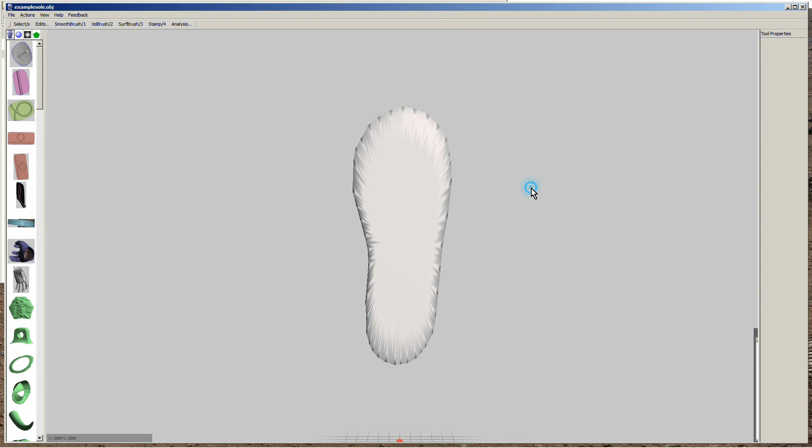Okay, there's your sole. Now you notice all that sort of distortion around the edges. It happens a lot when you transfer over from Hexagon to Meshmixer. We can fix that up just by remeshing it.

Luckily, we've got some face groups here. Notice the edge around the sole is green, so it's been grouped already for us. So we're going to just go ahead and remesh that—look how smooth it is.

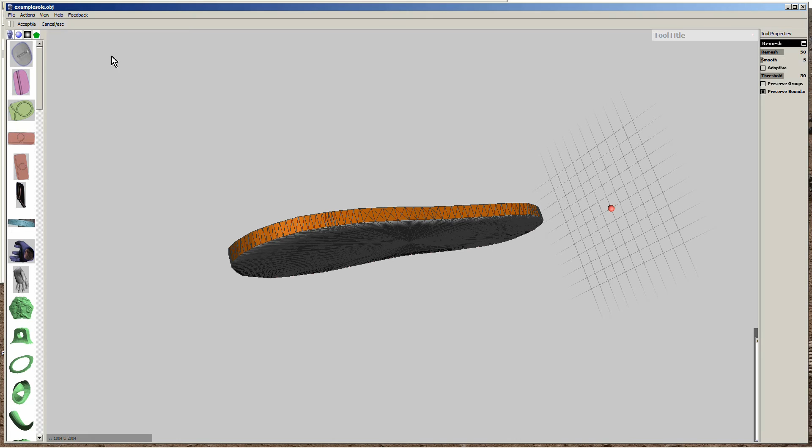See, we're increasing the polygon count here to make it smoother. I think Meshmixer is far superior at remeshing than Hexagon is, or Sculptris for that matter.

So now I'm going to do the flat part because all these triangles are not easy to work with or manipulate. We're going to remesh that, smooth it out 100%, and remesh it 100%, adding as many polygons as we can. This is the bottom of the sole, so it doesn't need to be as high as the top. You'll see why in a minute.

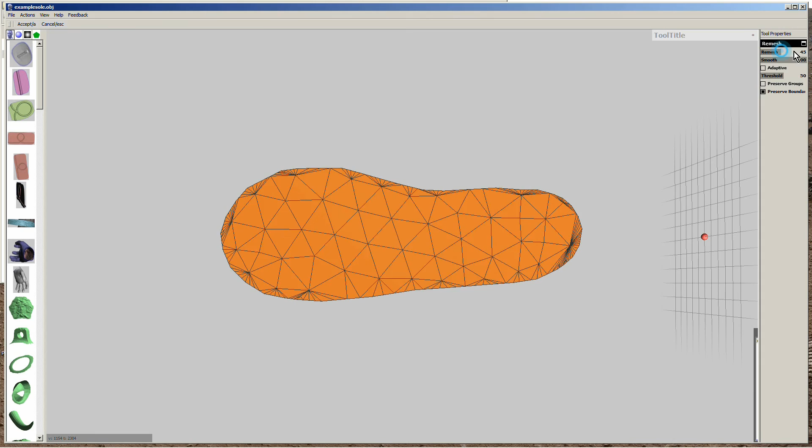This is the top. We really want a lot of polygons in here. So I'm going to mesh this twice—remesh this twice, I mean.

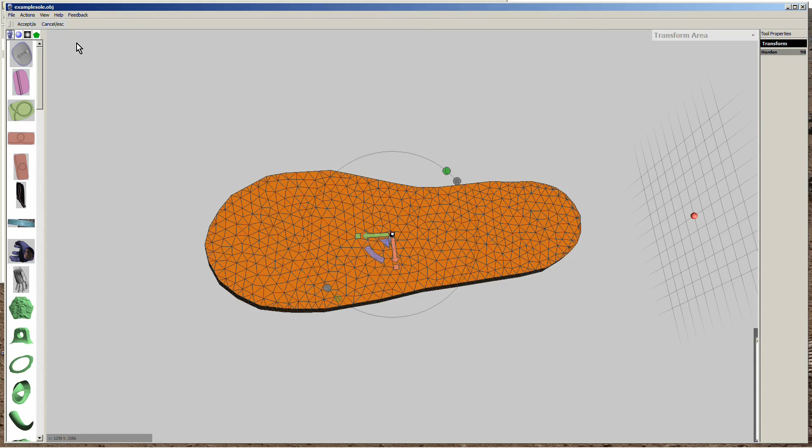Now we're going to start working with it. First thing I do is I use the transform to shrink the selected part of the sole. Now I'm going to start forming the top of the sole using this transform tool. I'll keep the clip at normal pace for a few of these sections so you get an idea of what I'm doing here. See, shrank it, so I've accepted that shrink.

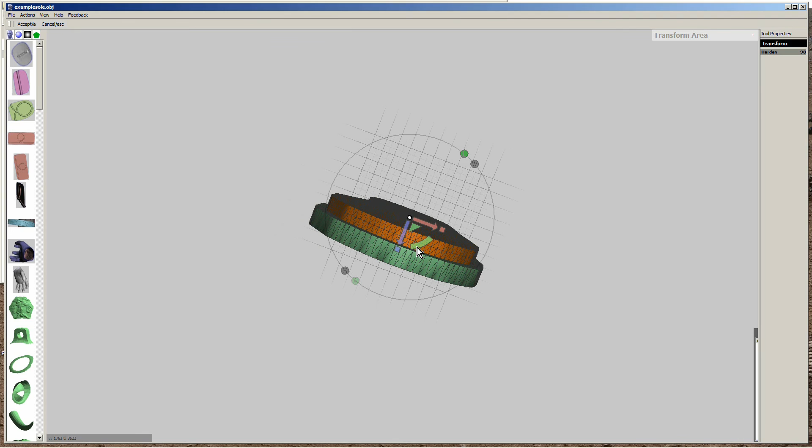Now I'm going to go ahead and transform it again to form the first rise of the toe. It's a little higher than it really should be, but I wanted you to be able to see it. Notice the rise. Now I'm going to grow it a little bit. I don't know if you've noticed, but shoes kind of come down into the sole.

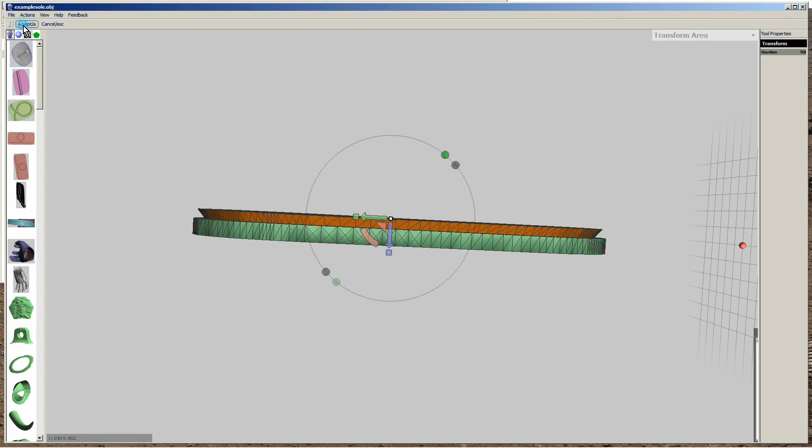Now this sole is real flat, but don't worry about this right now. We'll take care of that in the second part. I don't bother clearing this because I'm going to incrementally shape the sole using this transform tool.

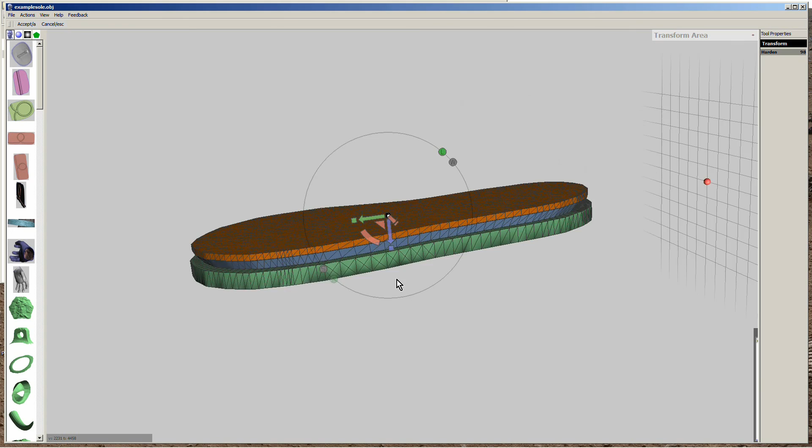Now this is the second part. I've just kept the group selected, and as you accept this transform, it creates a new ring of polygons, and it's a whole new group. See, your top there remains selected, so you can just keep working that way.

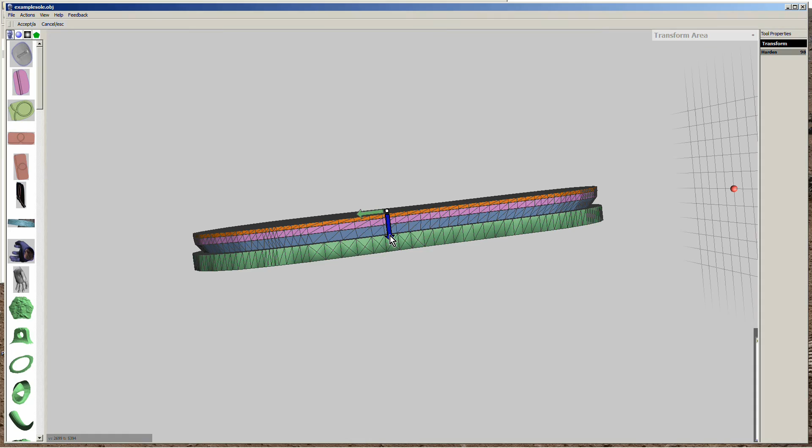And this isn't going to be the perfect shape. I'm going to have to tune that up later, but using the transform tool we can get really close, and what we do is create an even mesh, more or less. It's more uniform and easier to work with when it comes to actually shaping the shoe.

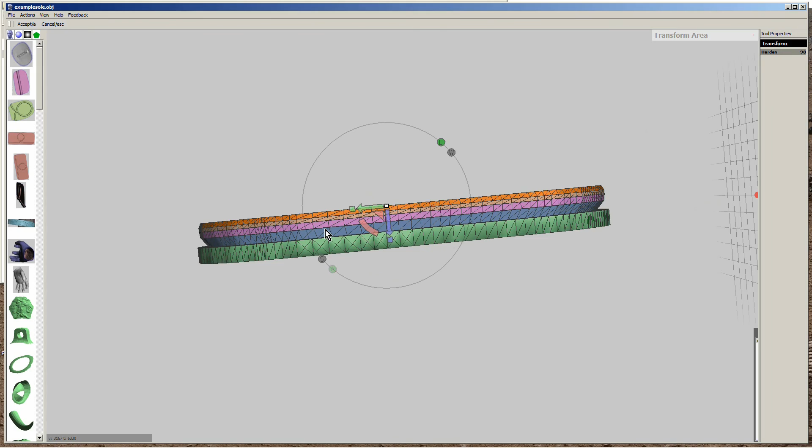I'm sure there's easier ways to do this. I mean, for one, you could probably scan it. That would be easier, but where would be the fun in that, you know? It's just scanning it, and mainly it's not what we do stuff like this for.

I had experimented with just taking primitive spheres and shaping them and putting them together, but this seems to be the best method so far. It comes out with a more realistic looking shoe every time. And of course this one's not going to look realistic because, like I said, I'm just doing this for demonstration purposes.

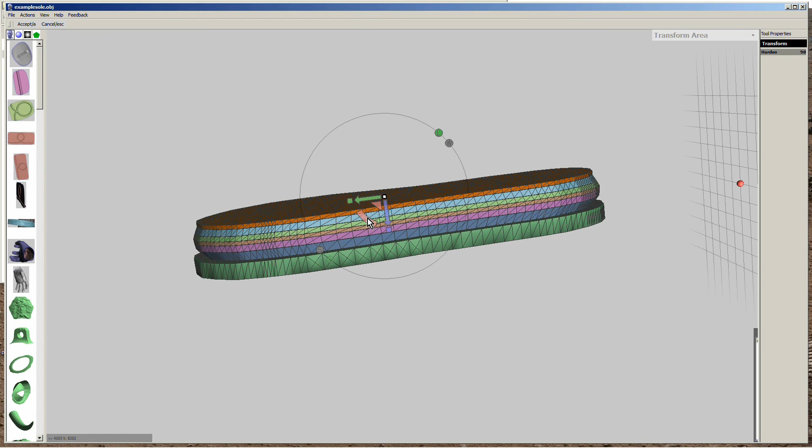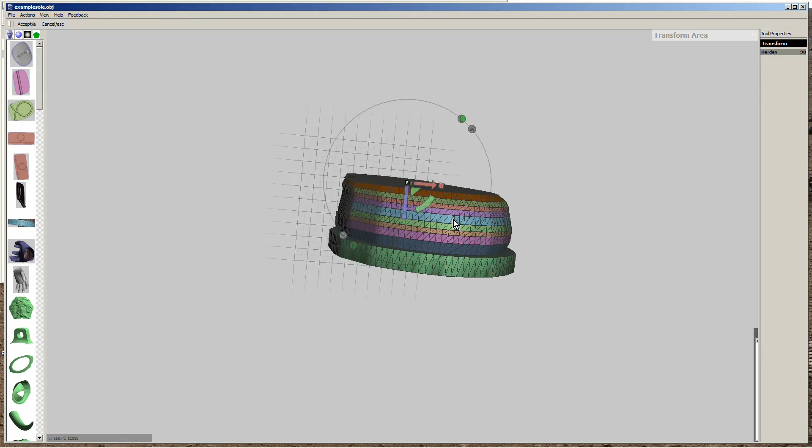I'm going to speed this up so that you don't have to sit here all day and see layer by layer. Basically I'm just dubbing this narrative in here. I'm not working on this right now, I'm following the video.

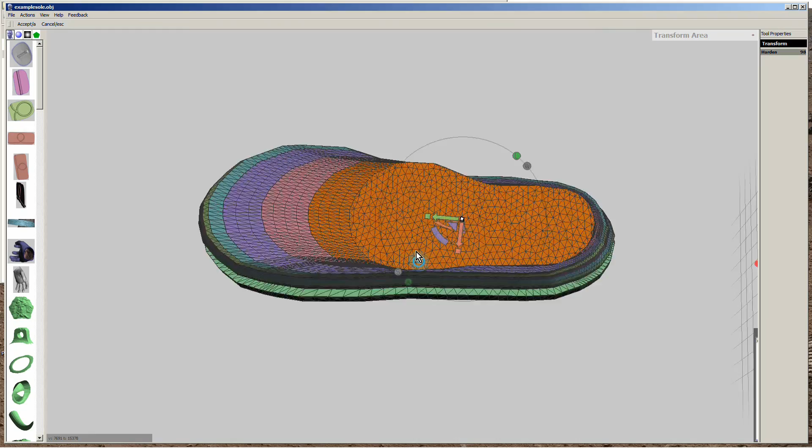So you can see I'm just building it up, and it's all kind of flat. It's taking on a basic shoe form. A few deformities here and there that will need to be tuned up. But the thing I like about it is the mesh is staying more like a grid, and it's easier to work with and simulate the look of leather, I think.

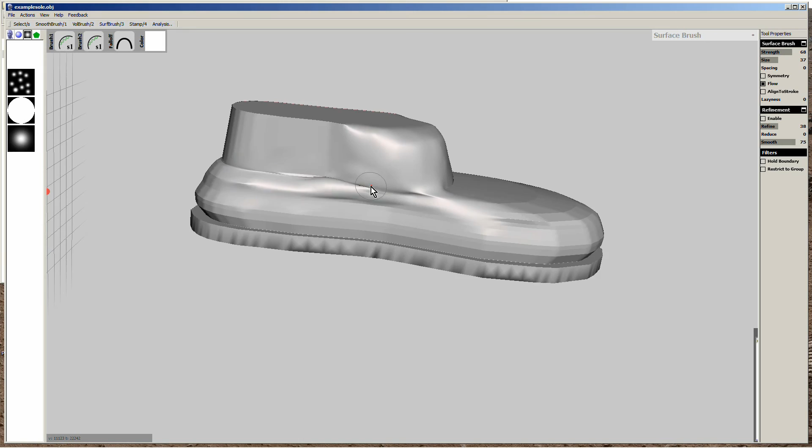Now I'm taking the vertex color off so that I can smooth it out. It's too hard doing the smoothing and shaping of the shoe with the vertex color, or with group colors, because you can't really get an idea of the shape. It's all colorized like that.

I'm working out some of the wrinkles. Now I'm using the regular smooth tool, and I'm using the bubble smooth, and I'm using the reduce smooth tools, and those brushes are great to interchange to get to the point you want to be.

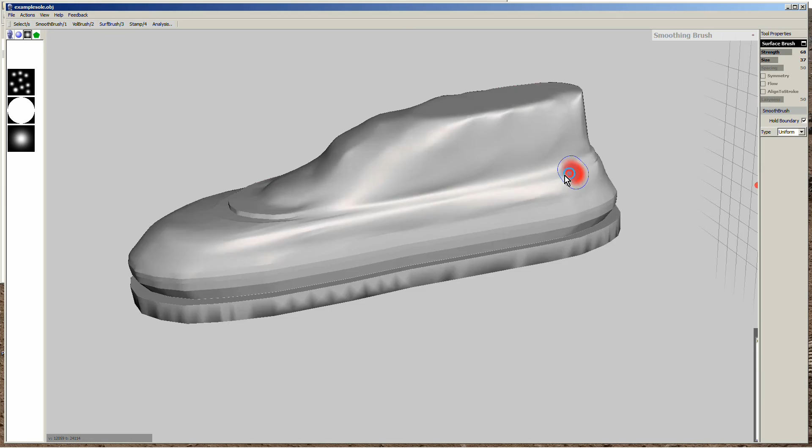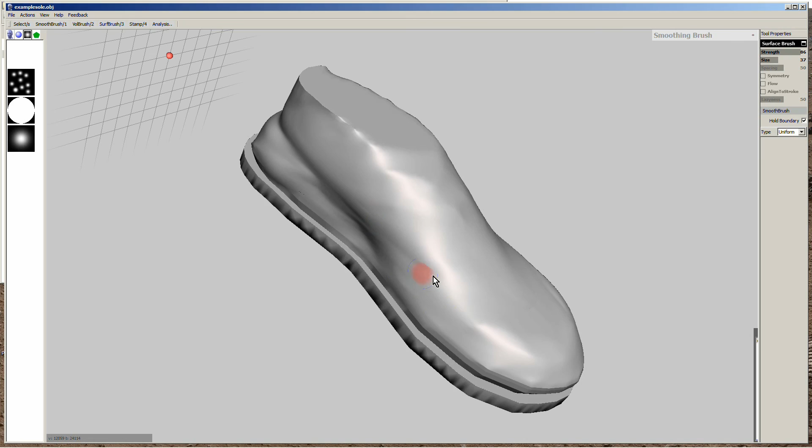That better. Excuse me, that's my chair. It's very noisy. Gotta get a new one.

So it's starting to take on the shape. I also like to use the inflate tool wherever I screw up.

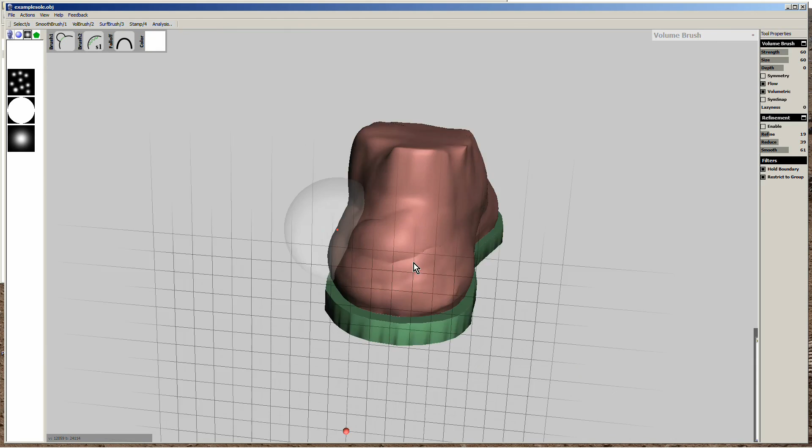Now, right now, I'm going to regroup it so that I can. The nice thing about the bubble tools and a lot of the brushes is you can restrict them to groups so that you don't mess around with your sole.

You want to keep your sole free of anything, just flat and the edges sharp. So it's always good if you work with the bubble tool restricted to groups and maintain boundaries so that it doesn't distort the boundaries between the sole and the top of the shoe.

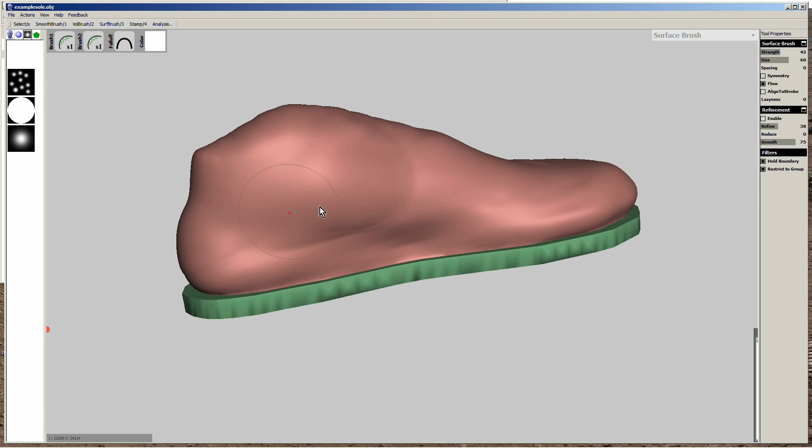Now this is the reduce or the bubble smooth right now, and the bubble smooth is smoothing out some of what the inflate did. The inflate tends to distort a little bit. It's not really even, it's not like Sculptris. You have to use a combination to get smooth shapes with this.

So this is kind of sped up too. Excuse me.

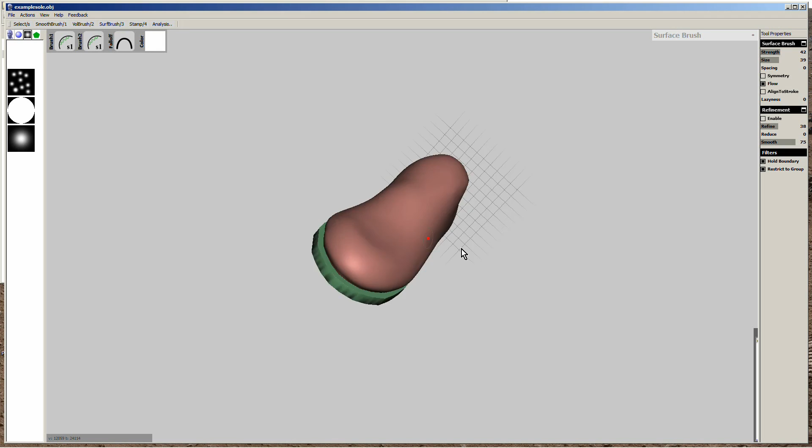And I'm putting in some wrinkles here and there. I use the plane cut so that I can level the shoe off, to make it look more like the top of a shoe.

Now I'm using the transform tool to put in an ankle again. This helps prevent the top of the shoe from getting distorted when you're working on the edge of it. You can remove it later, but sometimes I just leave it so that I can unify it to the pants.

Taking the whole shoe back into Hexagon now. The reason for that is Hexagon has this really sweet bending tool. Shoes aren't flat like that.

So what you want to do is bend the sole so that it looks like a real shoe. We're going to do that. Basically what you do in Hexagon is import the object, which is our shoe here, that we kind of semi-finished in Meshmixer.

Now with the line tool we're going to describe an arc. You can have an extreme arc, which is good if he's stepping or about to step, and your figure's about to step. So you can make the arc really extreme, which I'll demonstrate right here.

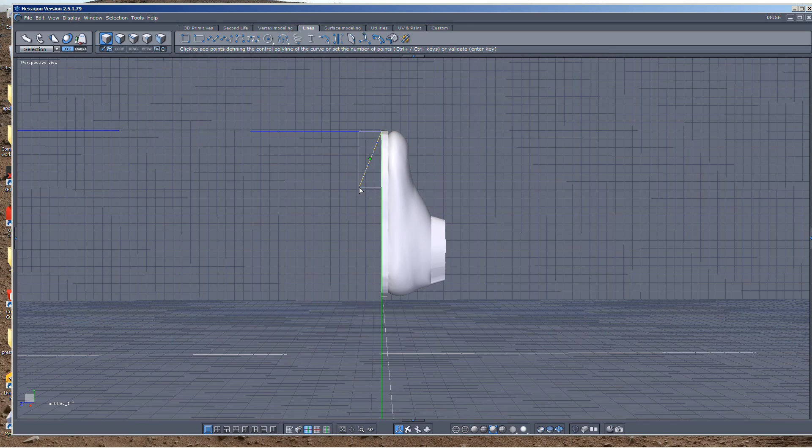With the arcing tool, or the curve tool, you can set more than one point. I'm just going to set one point here. This is going to be kind of extreme, not really a full step, but just to give you an idea of how much you can bend this shoe in the tool.

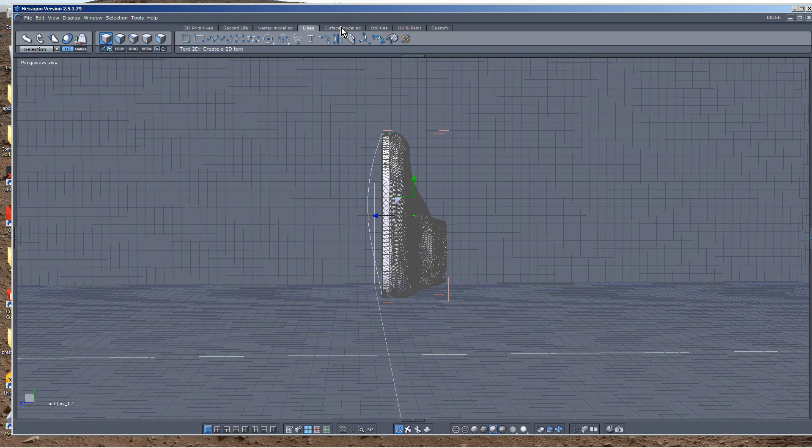Now you go to Utilities. You got to select your shoe first. Go to your Utilities tab in Hexagon and select bend, then select the curve you just made. See how bent that is?

That could be like he's almost beginning a step, but we don't really want that. We want the natural bend, as if it's standing. So we're going to get rid of this curve.

And I'm going to make a new line. It's going to be a gentler curve, so it's more like a natural standing position, or the shoe's not being used, it's just sitting in a corner somewhere.

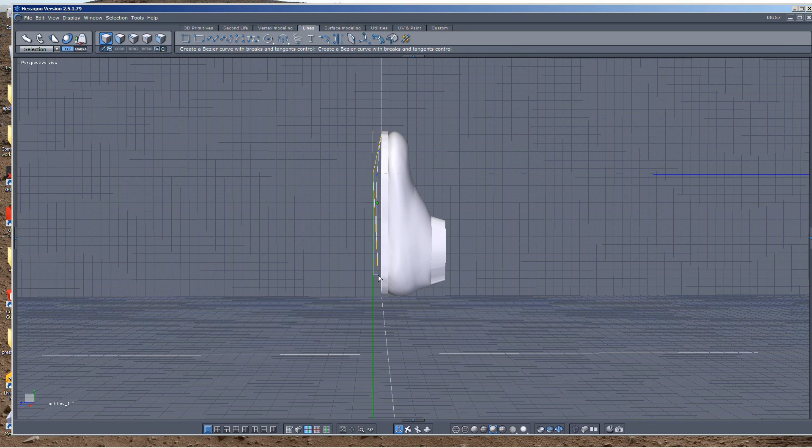I haven't added a heel right now. It's not a good idea to add the heel until after you've bent the shoe, because the bend tool bends everything.

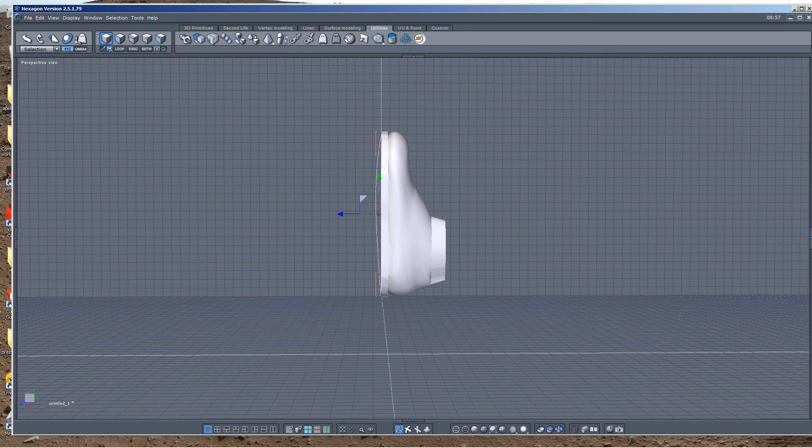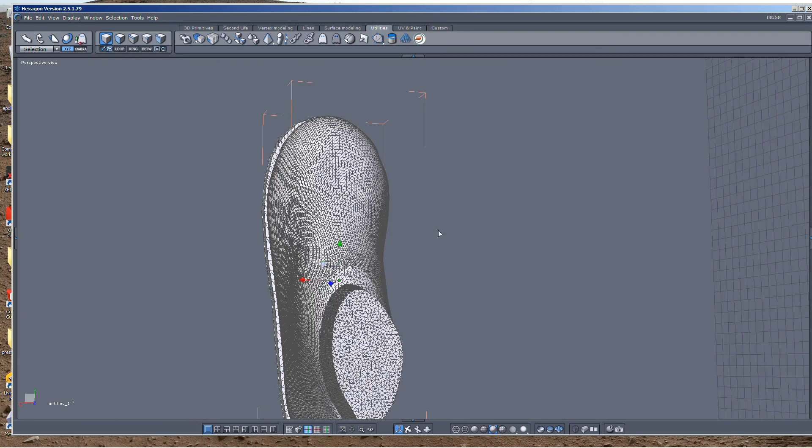Sometimes I get confused in Hexagon. Like I said, I don't use Hexagon a lot, but for certain things it's good. If you're going to sculpt for free, you got to take all the tools and learn how to use them. I use Hexagon, Sculptris, Meshmixer, MeshLab, Wings 3D, and Blender.

All free tools, including Daz Studio. You can pick that up for free too. And for a while, Hexagon was coming with Daz Studio. So anyway, I'll export it again. I think I'll call it 'example shoe bent.'

And I'll show you how to add some details, like stitching and stuff like that. Back in Meshmixer again.

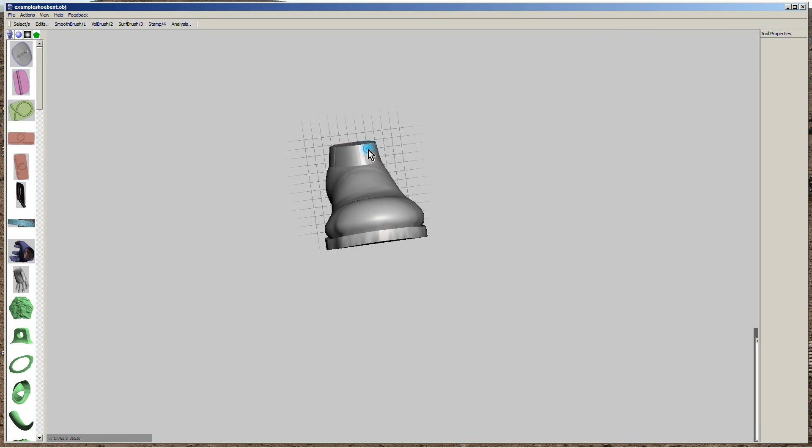There we go, we got our bent shoe, slightly bent. We're already in group coloring, so we gotta work with that.

There's a nice little option here in the edit tools. You can have it generate face groups. Sometimes they don't turn out well. As you can see, the band around the edge of the sole is all a bunch of different groups.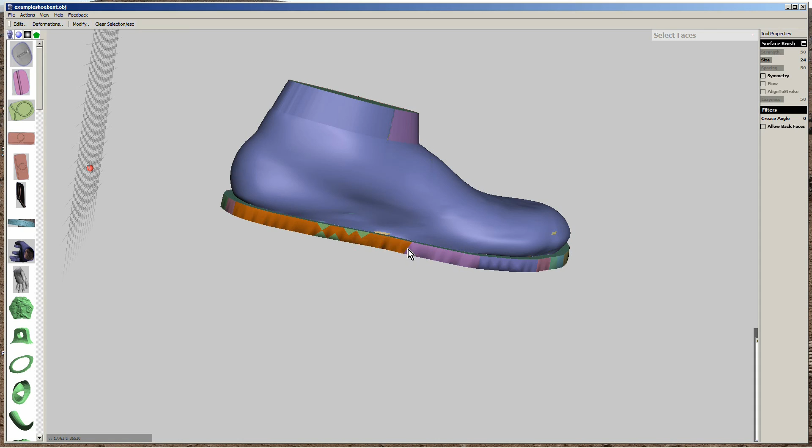But we need to remesh that. So I'm just going to quickly swipe around and select all the groups, I hope, and regroup it so that it's one group.

Then we'll remesh it. Grouping is really a great way to work on this, especially if you're going to be doing a lot of stuff in Meshmixer. You want to keep your groups separated.

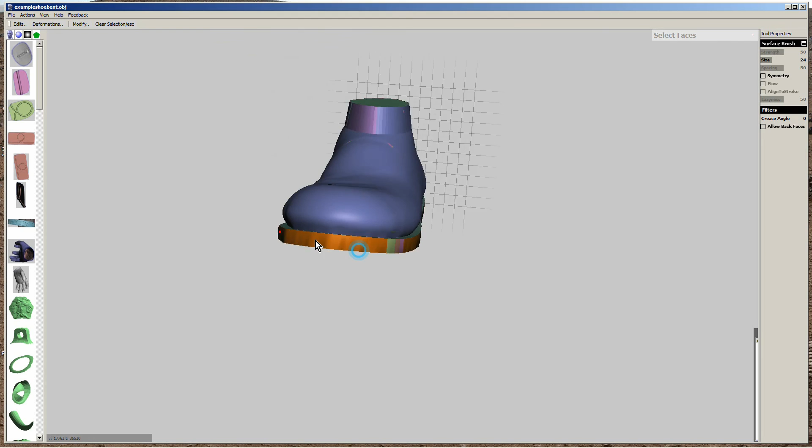Otherwise, Meshmixer tends to round everything off or try to smooth it out. I think it's an attempt to beautify the mesh, but it ends up looking pretty ugly, and it's not what you want. So anyway, I'm going to make that a group now.

There we go, we've got our own separate group for the edge of the sole. Now I'm going to remesh it so that it smooths out. You notice how it's got all that distortion in there? It's caused by the bending tool in Hexagon.

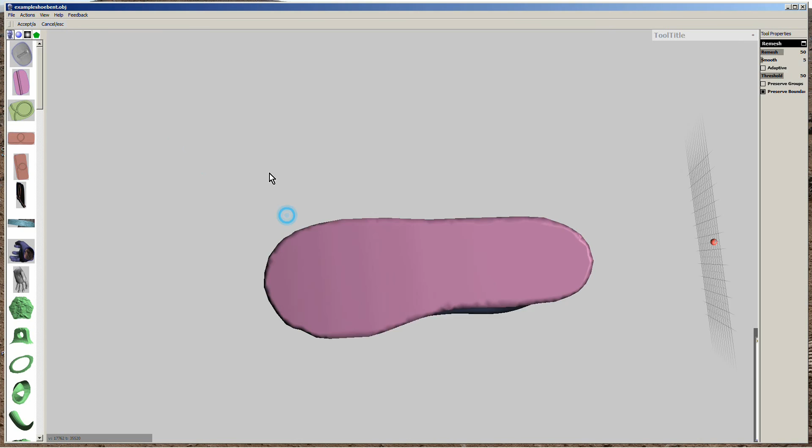Add a bunch of polygons and some smoothing on it. Keep an eye on the polygon count. See how it changes?

There we go, that should be smooth. We got a little dimple in there, but we'll fix that later. Now we're going to remesh the bottom of the sole and the top of the sole.

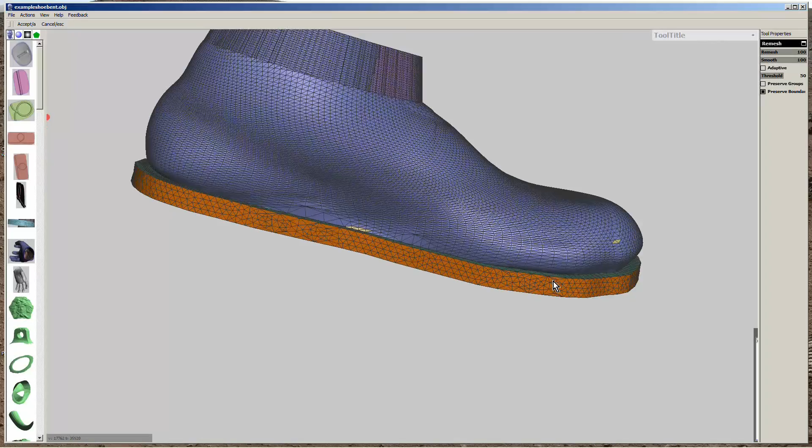Check everything out, make sure I've got all these facets smoothed and remeshed. I didn't miss any. Let's go to the bottom of the sole and remesh that.

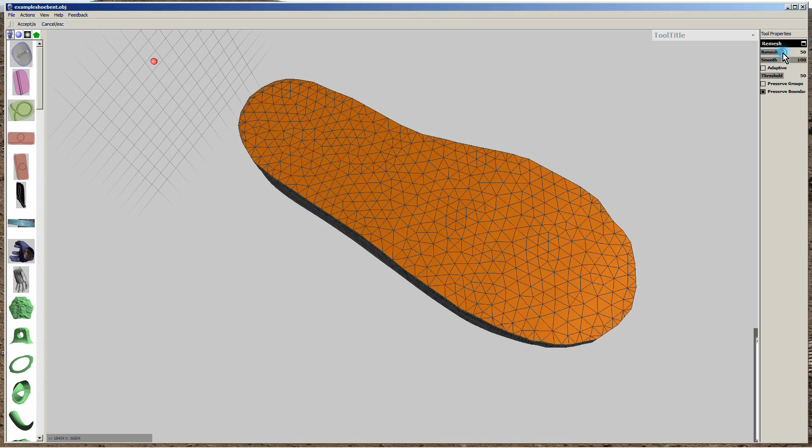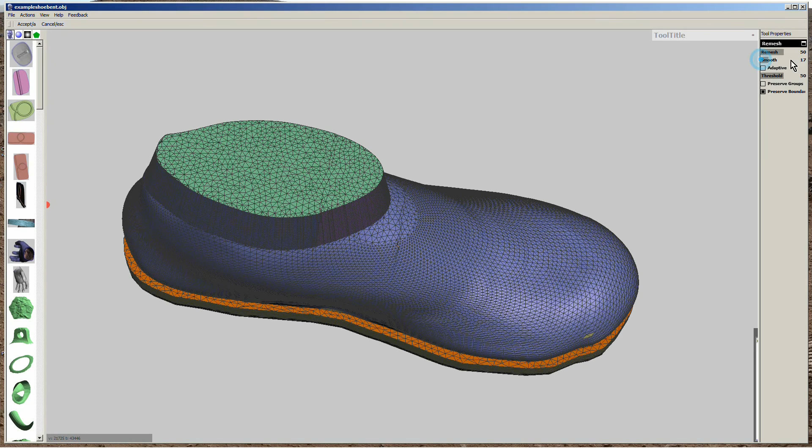It hasn't really increased it too much, but it's good enough. Once you finish adding detail to the shoe and you've got everything done, you can go ahead and remesh the shoe for a lower polygon count, and it will be one contiguous mesh without grouping. If you use the adaptive option, it'll keep its shape and form and look pretty good, but you won't have the tons of polygons that you're going to have in this shoe just to add detail. It'll reduce them all nicely.

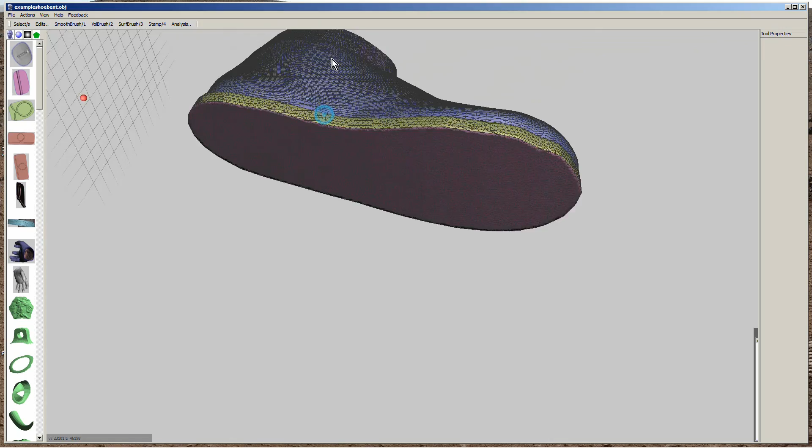But for now we want all these so that we can create the detail that will make it look like a shoe, well, as far as we can with this. I'm not taking my time on it. I'm doing it as quickly as possible, just for demonstration purposes, so I could show it to you in real time too, instead of speeding it up, doing a time lapse like I usually do.

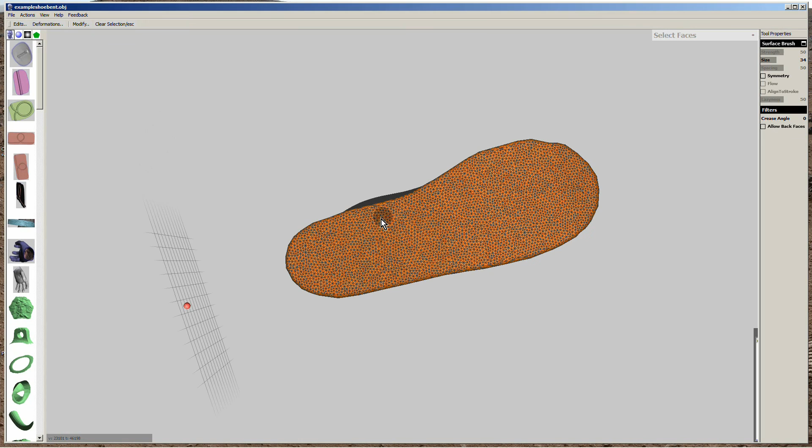The thing with the tongue, now I'm creating the heel here. I do that by selecting the bottom group and then eliminating this part of it as a selection until I've got a rough out of the heel. Now all that area there is going to be jagged, as you can see, you need a straight line to create a heel, otherwise it's going to look like crap.

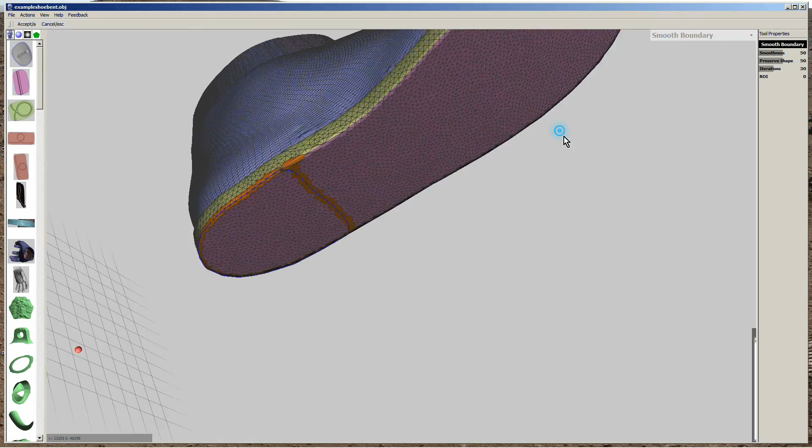So use a smoothing tool, and it straightens it out. It's a little bit curved, but that's okay. Later on you can take and use a Boolean difference and create a straight edge there by just importing a cube and using Boolean differences. But I'm not going to do this here. You could probably figure that out on your own.

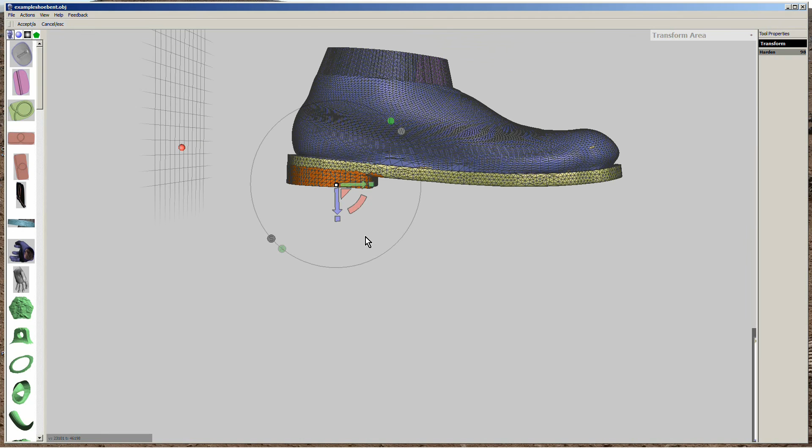Now I'm pulling the heel out, curve it a little bit, or put an angle on it so it looks like a natural heel. It's kind of crappy, but I don't want to spend a lot of time perfecting it. I'm not even working from a sketch of a shoe right now, this is all from memory, and yeah, I hope you'll forgive it. It's pretty crude, but it does look like a shoe. This is how I do it. This is what it looks like without the group colors.

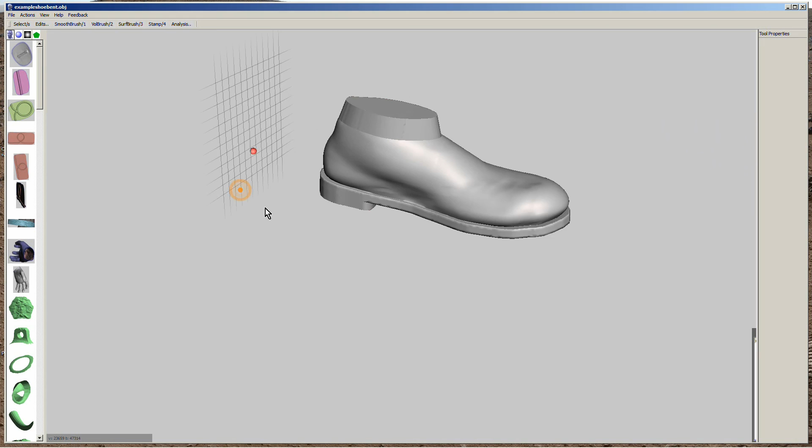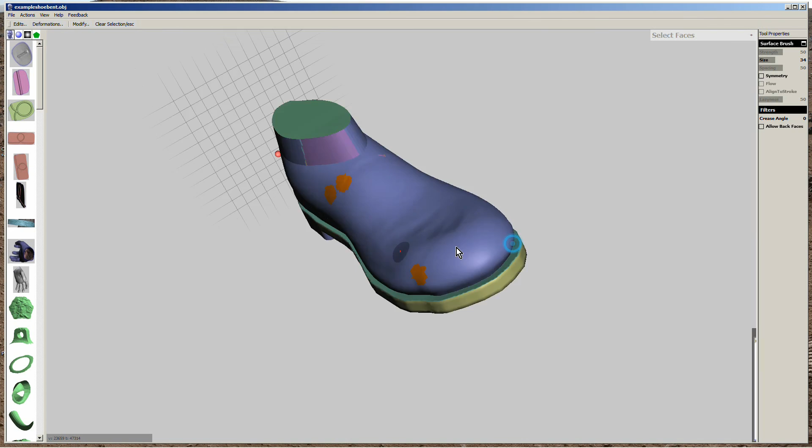Now, shoes have top stitching, and I don't know all the anatomy of a shoe, but I can see it, and we're going to kind of put the different sections of the shoe in. I do that by selecting a group of polygons and smoothing them, and it creates their own face group. But first I want one contiguous group for the whole shoe. There's a few spots in here that for some reason Meshmixer decided were part of another group, even though they're right in the center of one group.

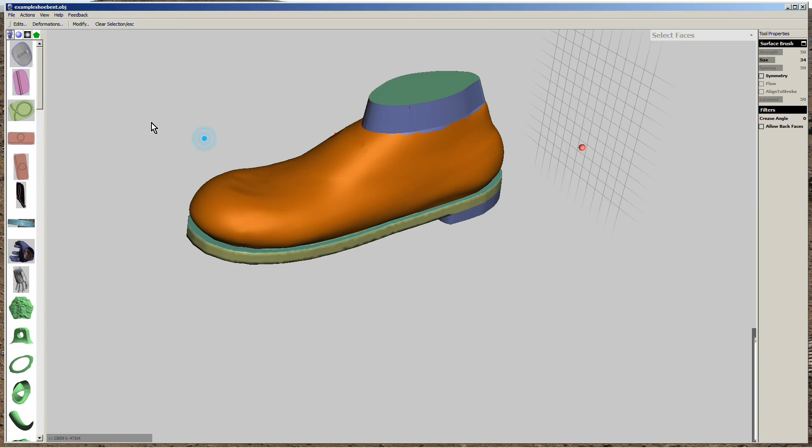So we're going to deal with all that. I don't want my ankle being a part of any group, that's just a placeholder there to keep the edges from collapsing. So I'm deselecting the ankle. Create a group, one contiguous group here for the shoe top. Now it's good, some of those edges were rough, so...

Now I'm going to cut out the toe of the shoe and make another separate group for that. And you'll see why I'm doing this in a few seconds.

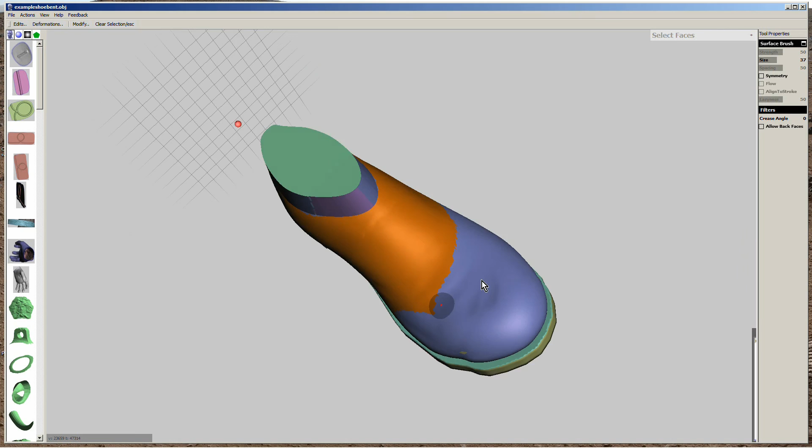Shoes are very, very interesting, I could spend a whole day on a shoe. And the nice thing about working in 3D is you literally only have to spend a full day on one shoe, because you can mirror the shoe once you finish one, and then add a few details to make it look like its own unique shoe.

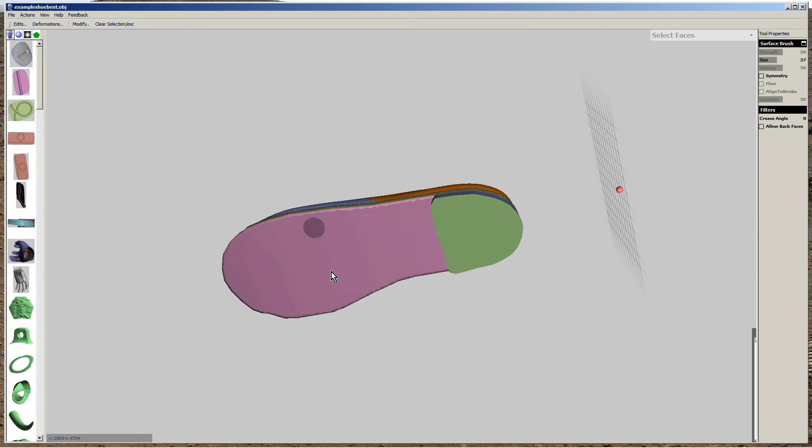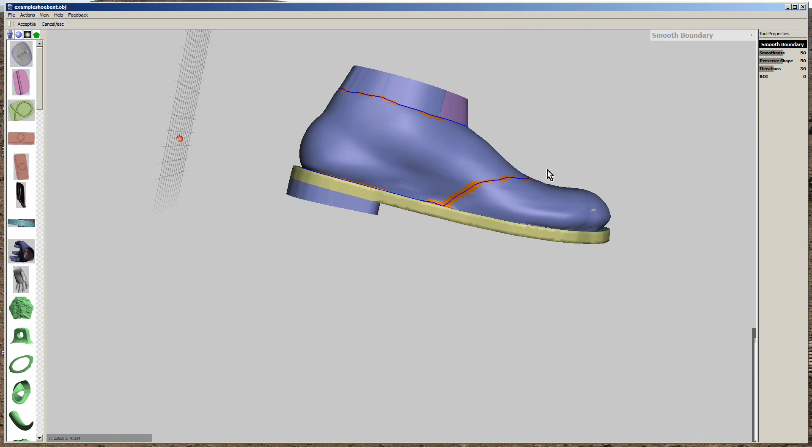So now I've defined this section of the shoe. It looks good, and I'm going to smooth it out so all the lines are nice and smooth. I put it on a range of influence down to zero because I don't want to influence the shape of anything else around it when I'm doing the smoothing. Looks pretty good, now you see I've got my own group for this section of the shoe.

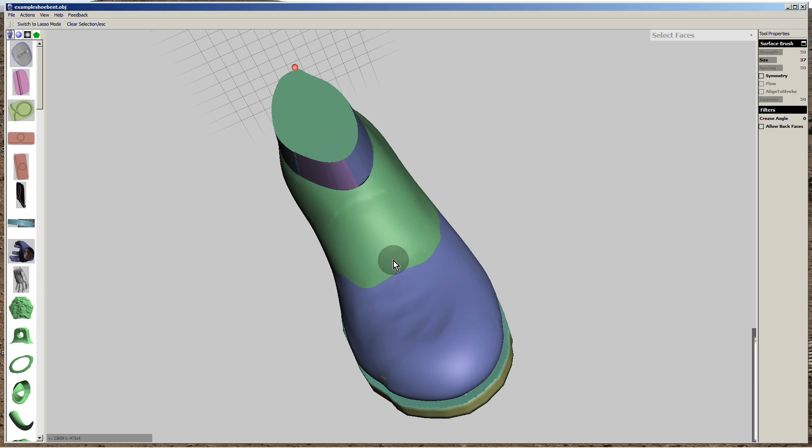I'm going to cut out the tongue here, and again, I apologize, this is very quick. It's turning out actually fairly good. I don't have a shoe here to look at, I normally work barefoot, so... looks pretty good actually, I might actually keep this one.

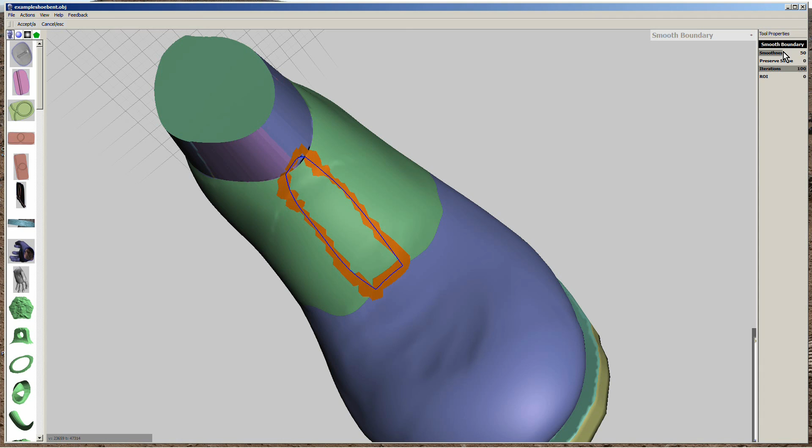Work on it a little bit more after this demonstration. Just so you know, this demonstration is only showing you Meshmixer and Hexagon. Later on I'll probably take this shoe, because it is starting to look pretty good, and work on it a little bit in Sculptris too. There I can add, use the creasing tool, they have a really nice creasing tool option, and their pinch tool is really good.

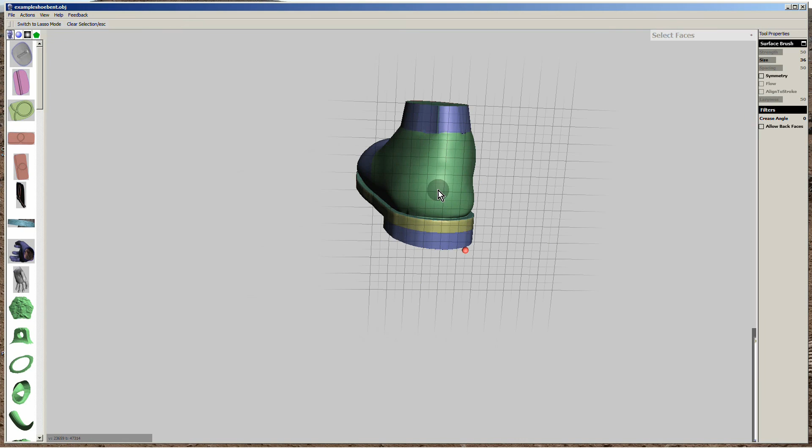Oops. Now I'm going to make the heel section of the shoe. I might actually turn this into a boot, a work boot or something.

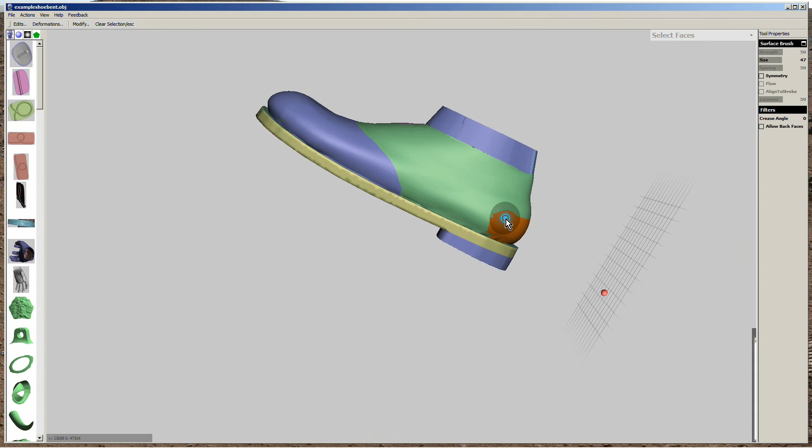Pretty sure this section goes all the way to the edge of the heel. I have to find one of my old boots.

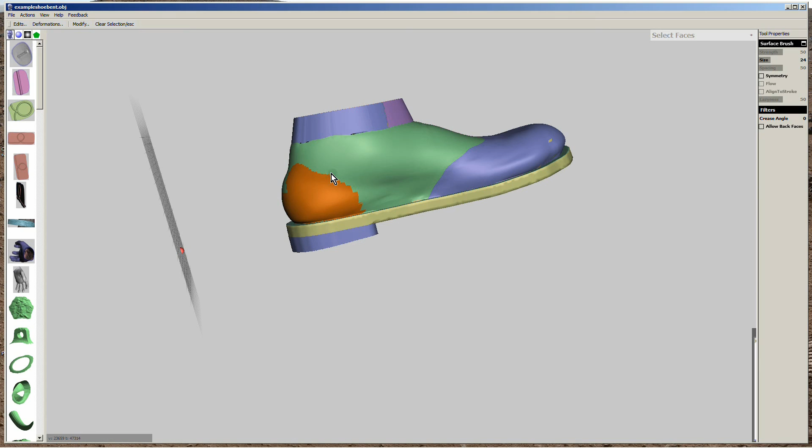Now, a good idea would be to save your work as a project so that it remains grouped until you're absolutely sure that your shoe is done. It looks like a shoe. I'm not going to do this because it's for demonstration purposes, so I'm just going to be exporting it as an OBJ.

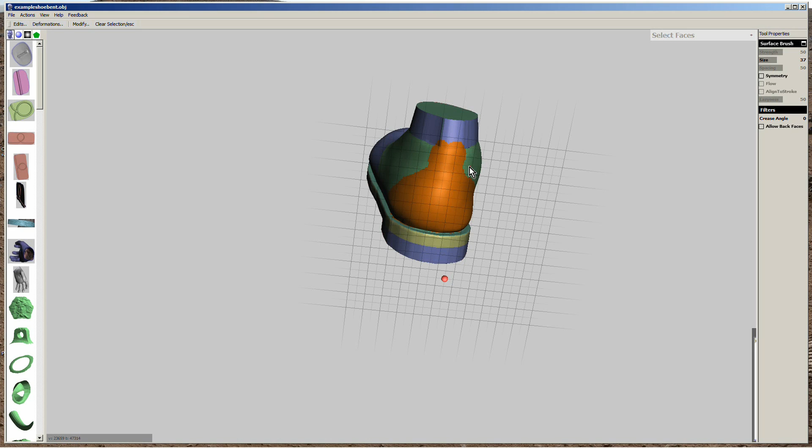Smooth it. Looks fairly good. Take that range of influence down. There we go.

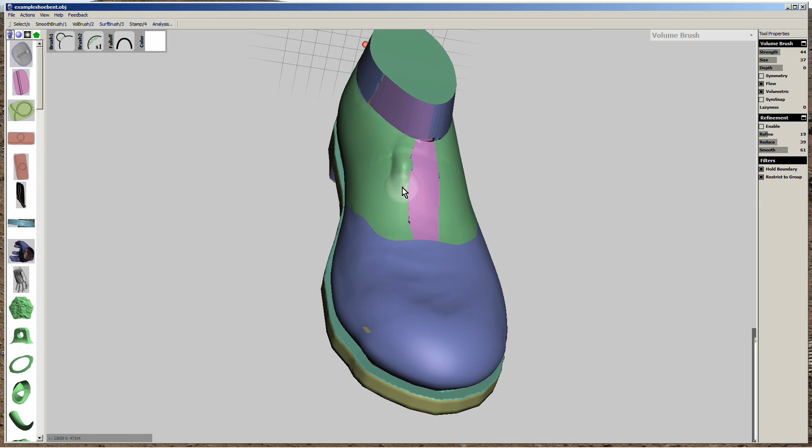It's a little too much of a bubble, and I can adjust it. You don't see me moving my mouse to make the adjustments on the brush properties and stuff, because I use the keyboard for that. That way I don't lose my place on the project.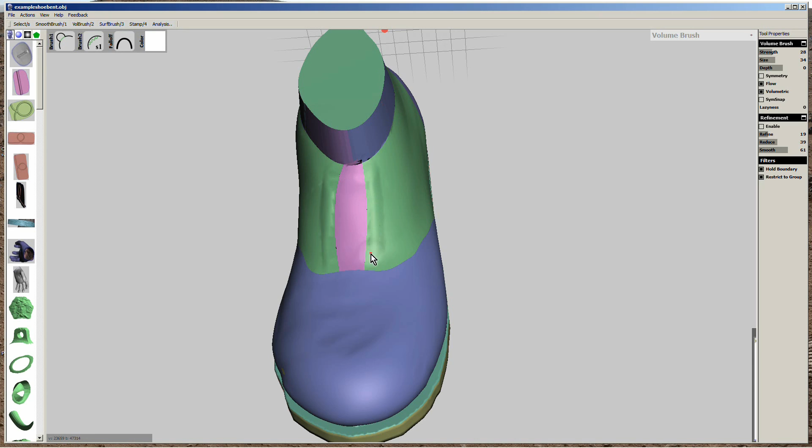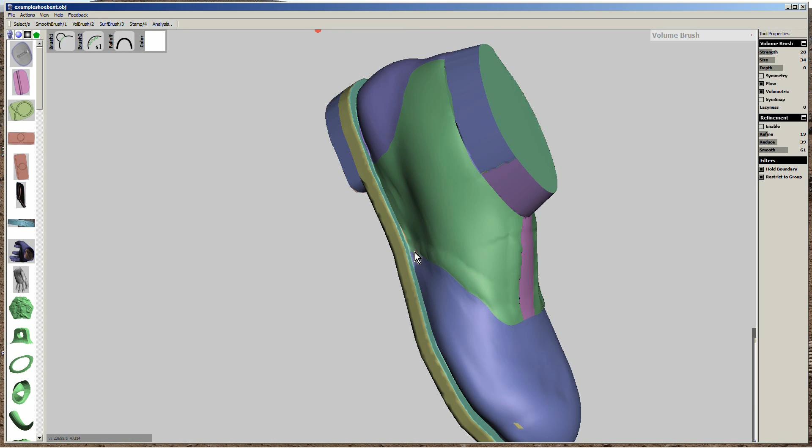Putting in the seams, they always bulge a little bit. Probably not this much, but I am moving kind of fast, and I'll refine it a little. In this demonstration I'm not going to spend a lot of time making those seams look really good, I'm just going to show you how you can make them.

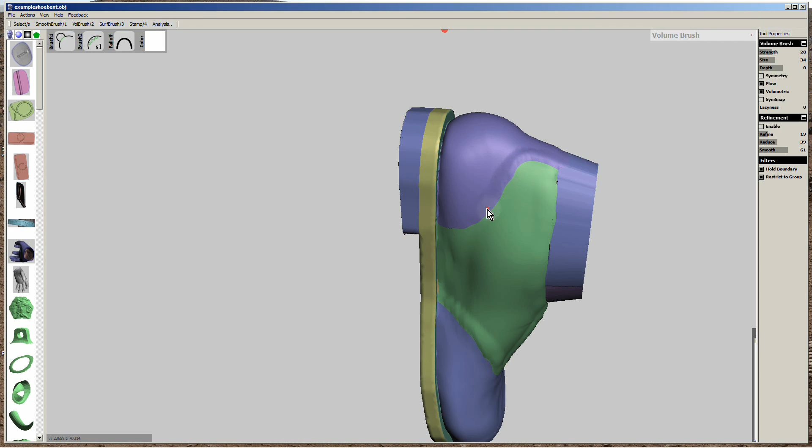And it's nice because, as you can see, restricting it to the group, it doesn't go outside of the boundaries of the group and create an inflated surface. The more I think about it, I think I'm going to, after the demonstration, work on this shoe a little bit more. I think I'll turn it into a boot. Oh, and I'm not going to show you the laces, but it's done pretty much the same way.

Now I've enabled the refinements so that it'll add additional polygons in these areas to help smooth them out, so it's not so chunky looking. The volume tool is kind of a chunky tool.

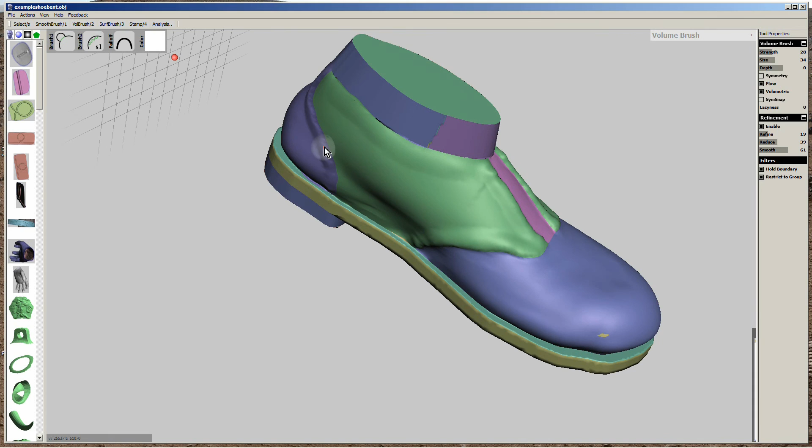I'll use the smooth brush. The volume smooth brush is a lot more refined, comes out with smoother lines. Then the reduce brush, which will smooth everything out pretty good. But you have to start with the inflate tool first.

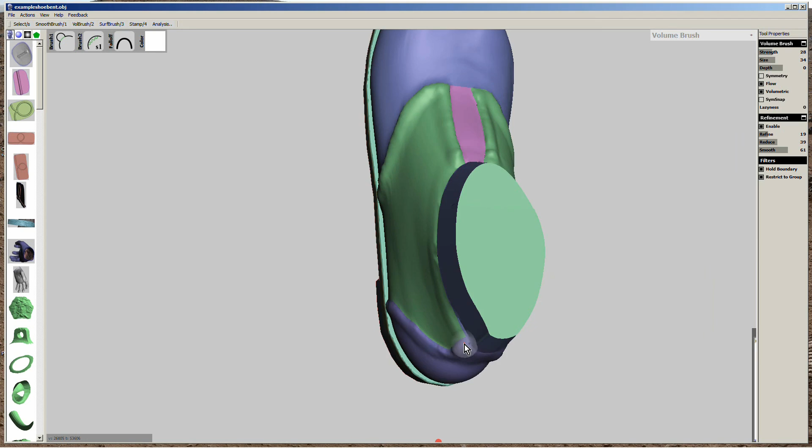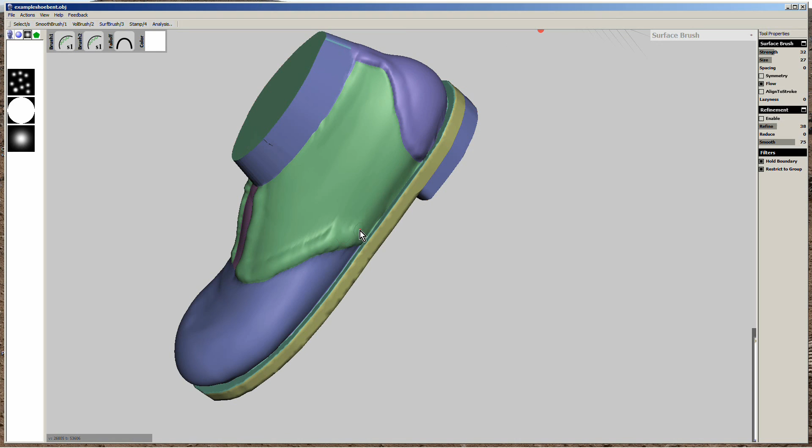Now you could probably use the draw tool to do this same thing, but I haven't noticed much of a difference between the two. Neither of them is smooth. You really have to use the volume smooth tool. Let's see. Kind of knocks down some of the chunkiness there.

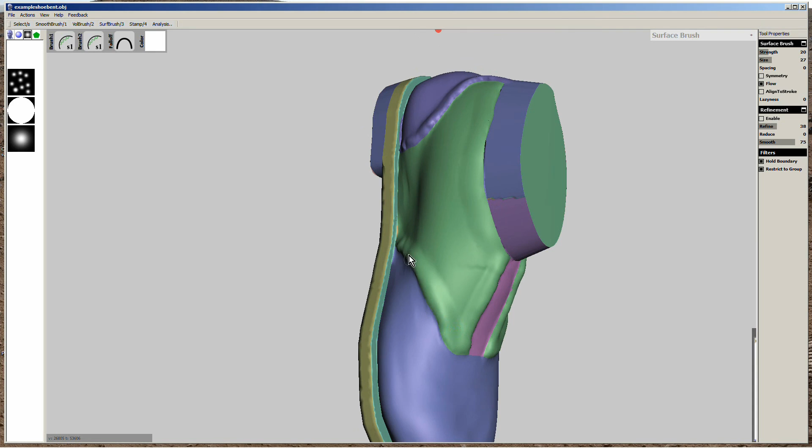Now there's more to a shoe than just these seams. Normally I build up the bulges around the laces too, using the same method.

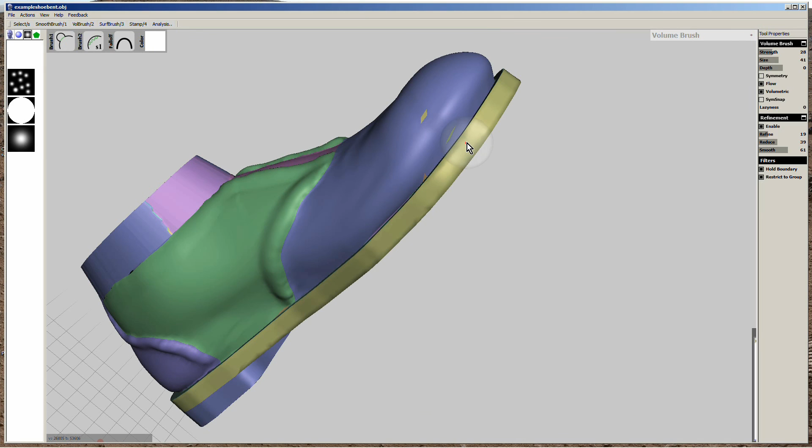I'm going to fix that nick there, it's bothered me. The groups come in handy. A little bit better.

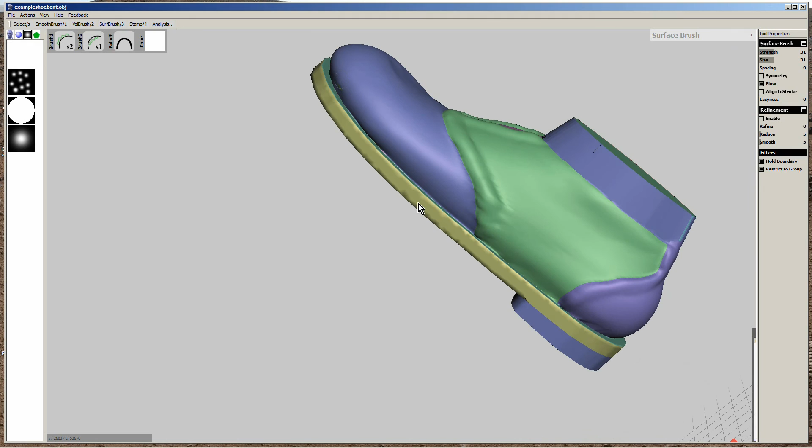Shoes are very interesting. I'm not going to finish this one here, but this is enough information for you so that you don't get too bored with the demonstration, and you can start out on your own. Again, like I said, there are probably easier and better ways to do this. You can build it polygon by polygon, or you can even scan it if that's your thing. I mean, some people probably do scan them. I don't have a scanner, so I don't think I would anyway, because it is kind of fun just to do it.

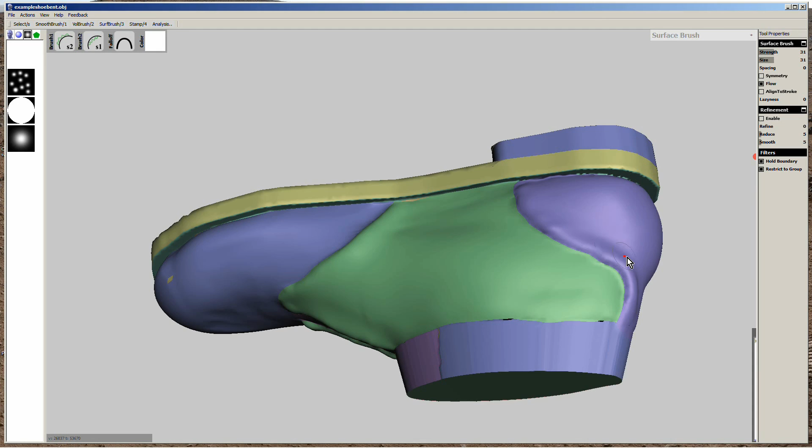The nice thing about doing this shoe is it's print ready too, basically. If you want to just send this shoe off to the printer as it is, it'll print out fine. Probably should hollow it out to save money on materials, but it'll print. There are no holes in it.

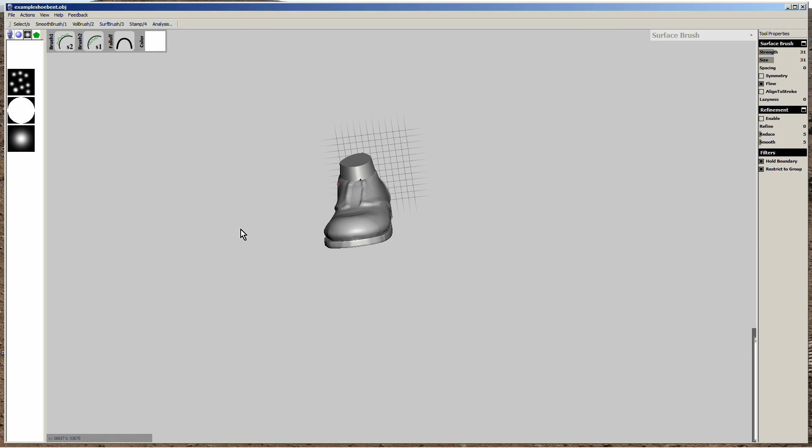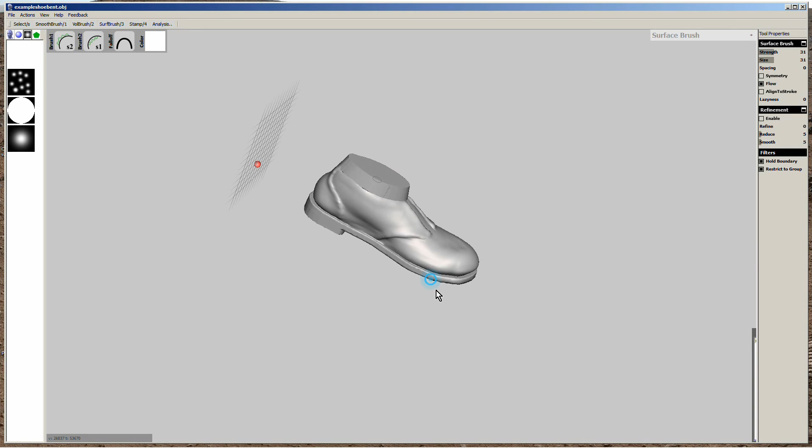And just for a rough start, a quick start, it's not bad. Like I said, I think I'm going to keep this shoe. I think I'm going to work on this a little bit more, add it to my folder full of clothing parts, and maybe use it on another sculpt.